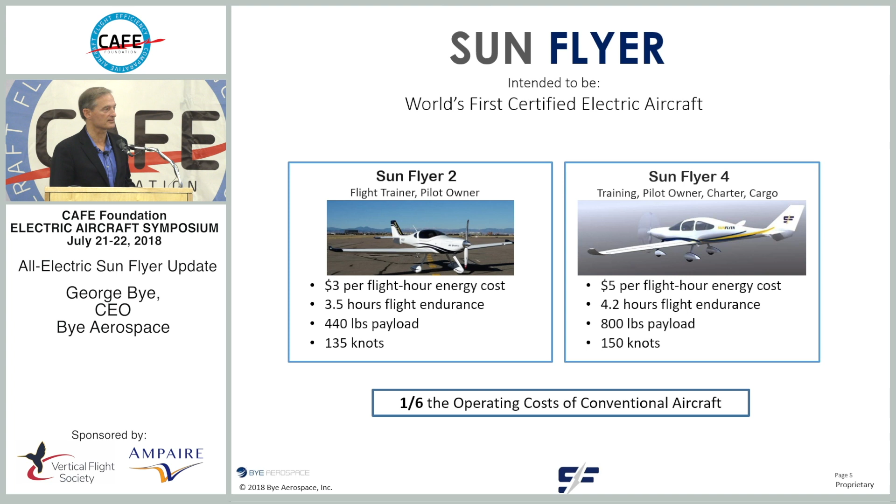But the bottom line is the baseline aircraft is the Sunflyer 2, and a combination, perhaps the most important aspect, as I've said, is the cost aspect. $3 per flight hour is absolutely revolutionary. The fully certified aspect of the aircraft is critically important as well. This last year, we made application with the FAA, the first in the world for a FAR Part 23 certified electric aircraft, number one. Very cool.

But one of the reasons why the Sunflyer works is that it's not constrained by weight. A light sport or advanced ultralight aircraft has greater flexibility, but from a regulatory perspective, it's limited by its weight. Batteries have come a long ways, but battery energy density and the weight of the battery system on a 1,900-pound aircraft is significant to enabling it to be a functional trainer in this case.

We have a 3.5-hour flight endurance with the Sunflyer. But the 1,900-pound gross weight enables the number of batteries necessary to have a practical utility as a trainer. That Pipistrel that was mentioned a few minutes ago is very limited. It's about a 45-minute flight time. It's difficult to have much of a training syllabus, training sortie in a 45-minute, perhaps an hour flight time.

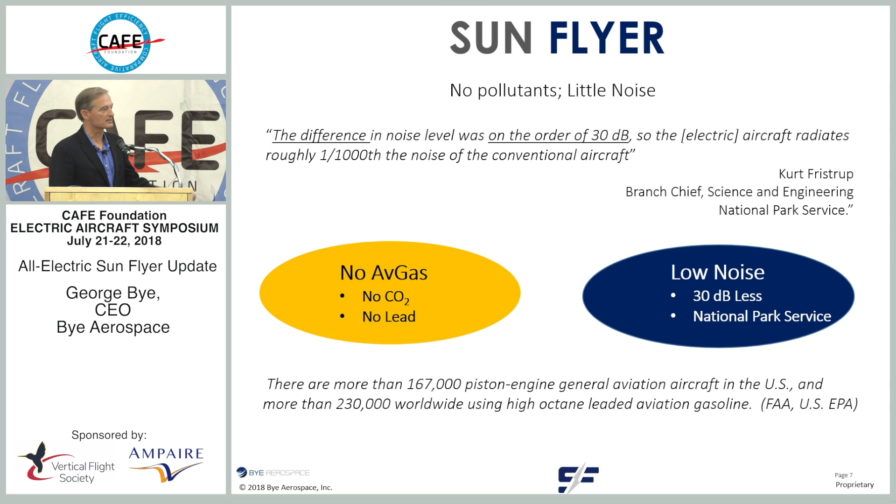Low noise, no avgas, no leaded fuel, and of course, a fantastic operating cost. The combination of engineering enables it. It's not just batteries and motors. As I mentioned, it's also structures and aerodynamics. And all together in combination creates the Sunflyer.

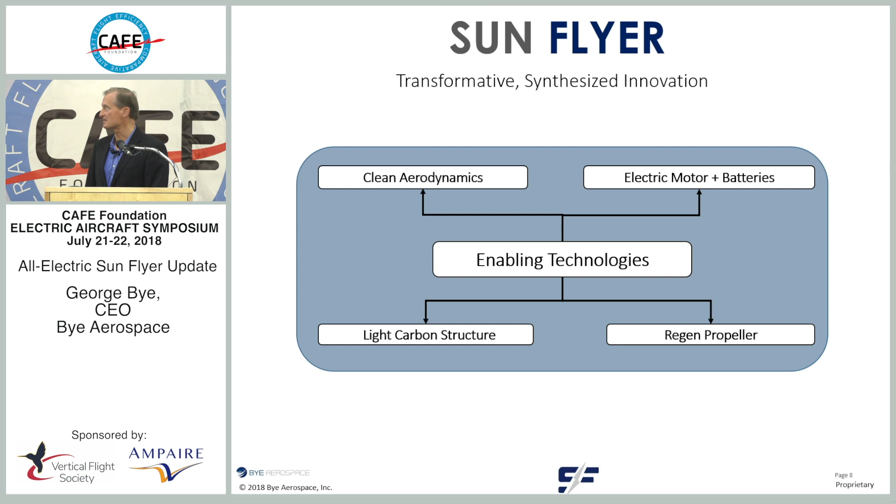One of the things that is mentioned often is, what about safety? And of course, we've heard and seen along the way a little bit of the safety discussion come up. We've had meetings with the FAA with regard to our batteries, with regard to the development and engineering process on those batteries.

We're partnered with a company called EP Systems. EP Systems is the lead engineer and battery provider for the NASA X-57. They not only meet the DO-160, but they also meet the NASA criteria for safety for batteries. And it's not just an engineered safety, it's a laboratory-tested, crushed, broken, poked, destroyed. They literally did everything they possibly could to demonstrate incredible safety with a brand new high-tech battery pack. Those battery packs will be flying on the X-57 soon, but they're flying today on the Sun Flyer.

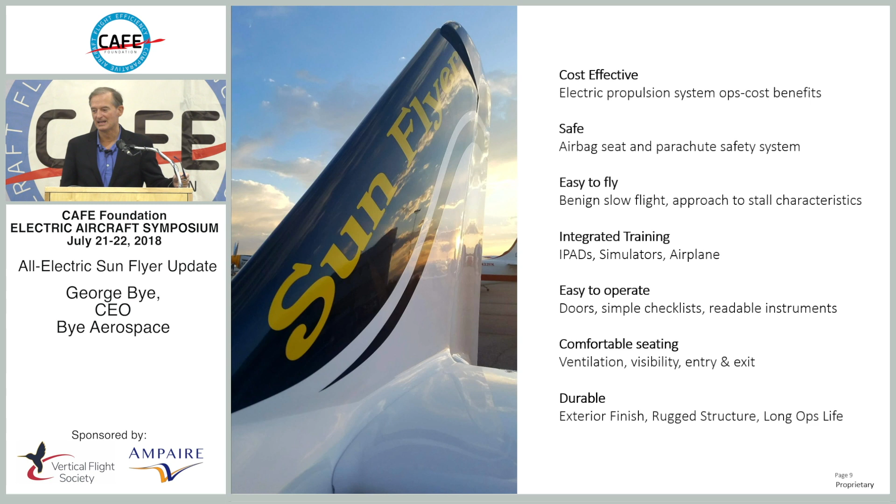That translates to average energy used. And if I need 20 to 25 kilowatts per hour on average to fly, and I've got 73 kilowatt hours useful, in addition to reserve, in addition to a depth of charge reserve, that means I have an over 3-hour flight time. It's just that simple in terms of physics. I've got a battery safety margin, an FAA 30-minute VFR reserve margin, and then I've got 73 kilowatt hours left. So if I'm using an average of 20 to 25 kilowatt per hour, that's how simple the physics are.

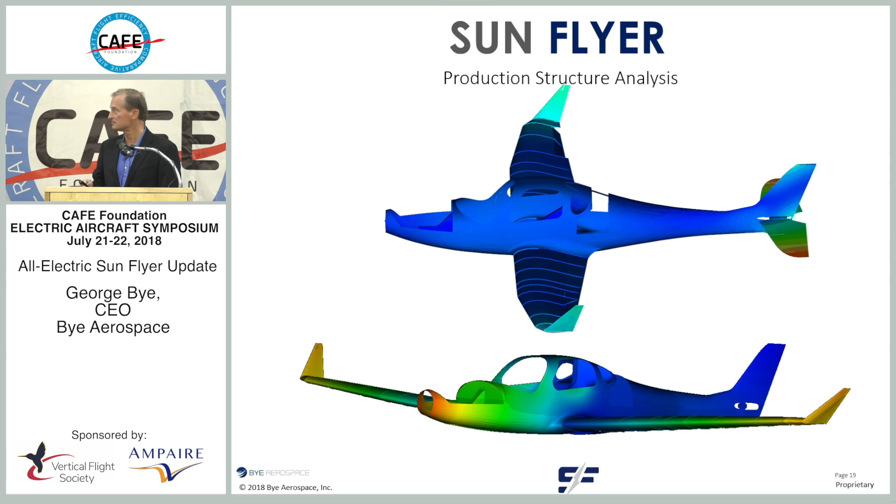That's a dry wing. The aerodynamics of that wing benefit from a simpler, more elegant structural arrangement. We have 1 square foot of flat plate area around the nose of the airplane compared to 11 square feet of flat plate area on a Cessna 172. Great aerodynamics translate to great efficiency, and of course, lower thrust required and more efficient operation.

So as I mentioned, tremendous performance out of the airplane - over 1,000 feet per minute rate of climb, 138 knots at 5,000 feet, over 20 knots faster than the Cessna 172 that we're replacing. Let me repeat that: over 20 knots faster than the Cessna 172 we're replacing.

When the Prius was introduced, we were all thinking, oh my goodness, here comes electric, and it's boxy and it's slow and low performance. Along comes electric aircraft, and people have this perception that it's an ultralight, light sport, it'll kind of plod along - maybe efficient and quiet, but no performance. At 5,000 feet, 138 knots, and that's with another 10 kilowatts yet to go in our continuous power rating. In other words, we'll be even faster than that with the two-seater.

You know what our altitude is? I'll take from the audience any suggestion what our altitude is for the Sunflyer. 280 was one. Anybody else? Higher. It is higher. Carl, I'll give you a shot. Josh? 38,000 feet. Now, practically speaking, of course, 17,500 for a VFR airplane, et cetera. But electric doesn't consume oxygen - there is no density altitude restraint for the Sunflyer. 38,000 feet, amazing. Whole new possibilities become imaginable with the Sunflyer.

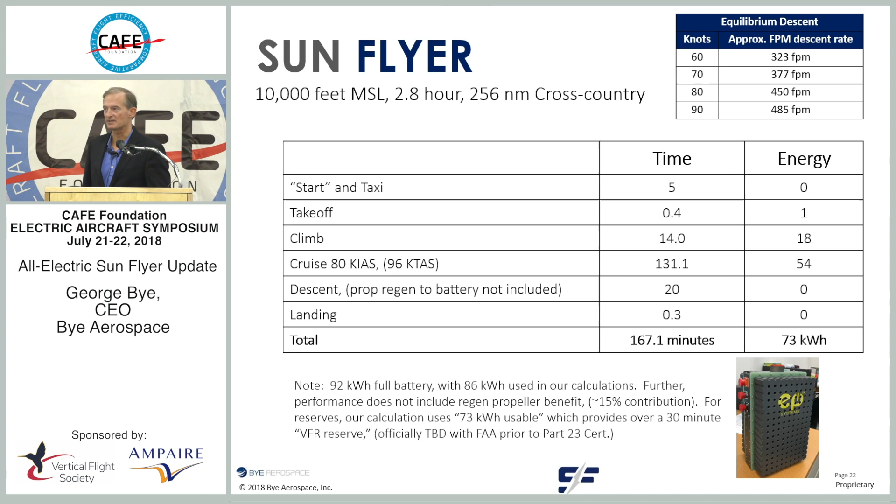Here's a typical cross-country: 2.8 hours, 10,000 feet, 250 nautical miles. Absolutely no restraints on a typical flight training syllabus. And again, I mentioned 73 kilowatt hours - we actually have 15, almost 20 kilowatt hours more in the battery pack than what we're using as our baseline performance measurement. That includes the VFR 30-minute reserve and a further restraint on the battery pack itself for its longevity. And of course, the standard meat and potatoes - takeoff and landing, pattern work, the 1.2 hour syllabus typical - is well within the capability of the airplane. In fact, we can probably double, almost triple turn the aircraft before recharging.

This is the bottom line for a flight school. This is why the flight schools are ordering aircraft. When it gets right down to how you maintain and operate and fly a fleet of trainers, this is the bottom line. It boils down to cost - $14, including battery pack reserve.

And the fun thing about battery packs is they just get better. So in about the 3 to 5 year timeline that we're replacing the battery packs for a high ops tempo flight school, the battery pack energy density will likely have improved by about 30%, perhaps as much as 50%. So the 3.5 hour flight endurance Sunflyer 2 now becomes a 4.5 or 5 hour Sunflyer 2, and the 4-seat Sunflyer even better. The fun thing about electric is not just the economics and aerodynamics, but also the future and how we look forward to an improving future as batteries just get better.

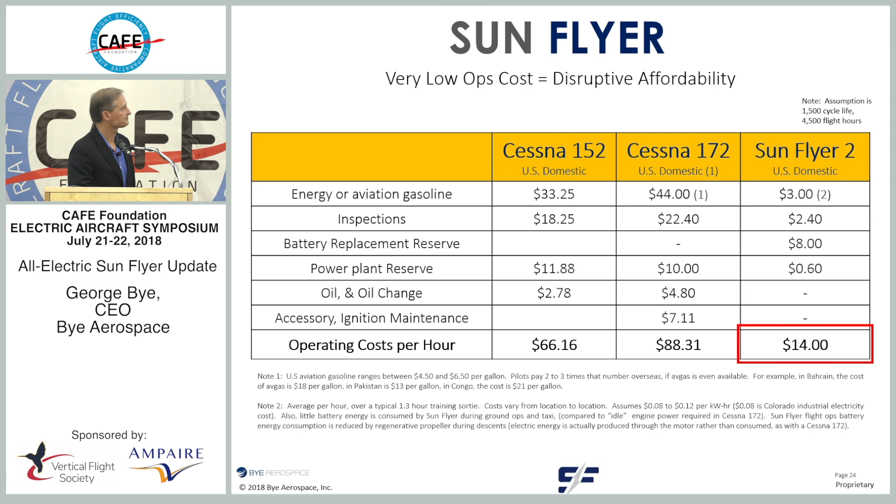And of course, on a cross country, depending on how you're using the aircraft, the numbers change. We call it a $100 hamburger when we go with our friends for a cross country to get lunch somewhere. This kind of changes the metrics.

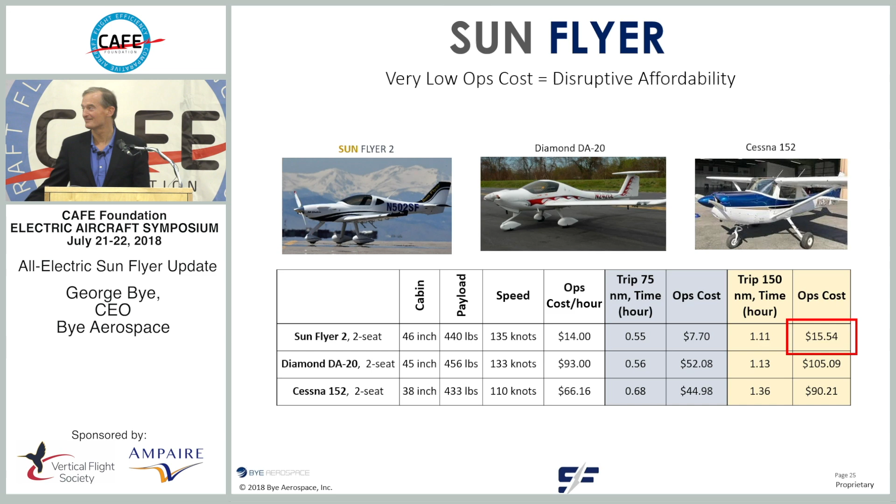And of course, the Sunflyer 4 we introduced last year. Many of our friends, pilot owners, are putting orders in now for the Sunflyer 4 as well. It's the stretched version of the Sunflyer 2, about 36 inches longer, and of course heavier, allowing for the additional battery packs, the higher speed, and the longer range.

And again, you look at the economics with a Cirrus or a Cessna 182. Absolutely compelling. It's not even fair. It's hard to imagine in the same market electric aircraft with conventional aircraft. Imagine a 50-year-old Cessna 182 sitting next to a brand new Sunflyer 4 aircraft. The economics and performance are so disruptive you cannot put the two in the same market.

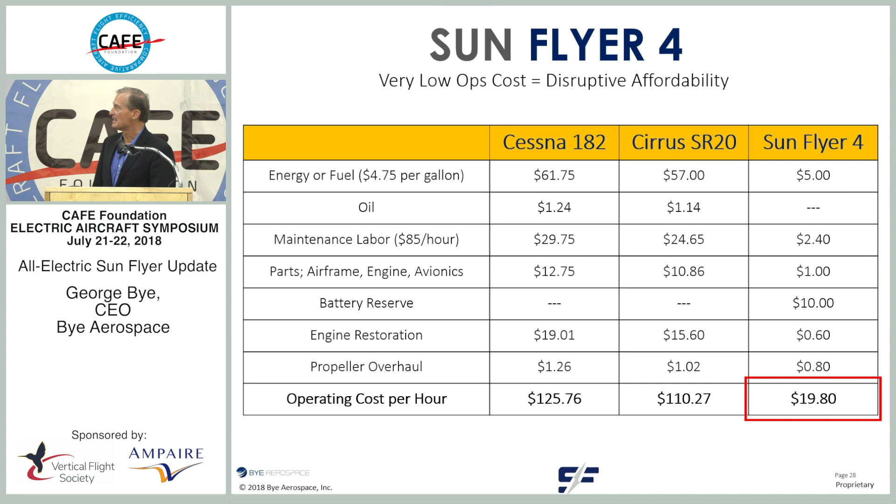We'll look at the Los Angeles area as one possibility, and of course there's many metro areas that have similar kinds of density. I think there's some 30 plus airports in the LA area, 30 to 50, depending on how you count.

Imagine the possibility of using those airports today that cannot or are underutilized, providing support for commerce and transportation, charter, and personal use in that area. No emissions, no noise, and extremely low cost. Santa Barbara to LA in an electric airplane, 3 to 4 times faster than it would be to drive, and less expensive than it is to drive.

So you look at the economics again compared to some of the traditional general aviation aircraft.

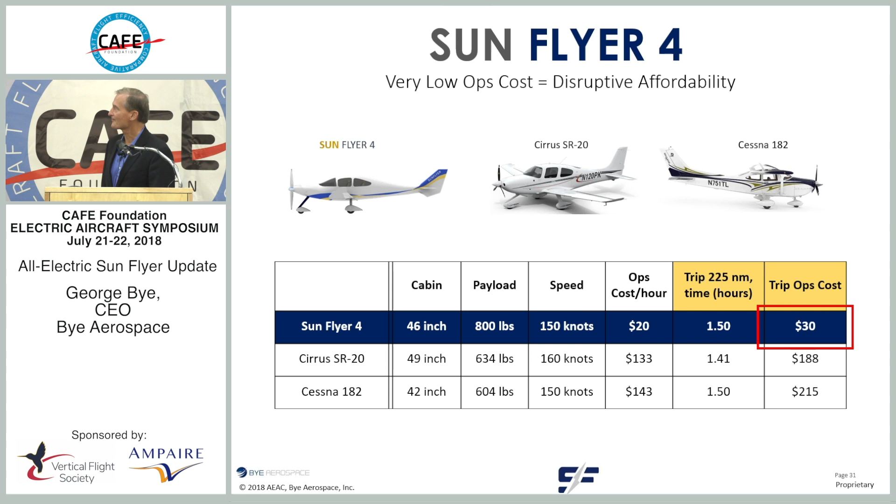So in kind of wrapping up, it's important, I think, from our perspective with Bye Aerospace, that our innovation and pioneering work is to solve a problem. You look at all the statistics and the numbers around the industry that we're concerned about addressing. Electric aviation addresses these problems. If you understand the demand from a broader industry perspective, what that means to the people that need to fly those aircraft.

That translates to a trainer demand and a rationale for Bye Aerospace and the Sunflyer to exist. We need to have solutions that meet economic requirements. It's not just recreation, it's innovation with a purpose. It's a lot of pilots and a lot of aircraft, and again, the number one reason why they drop out is cost. So addressing that with the Sunflyer is a huge, huge requirement met.

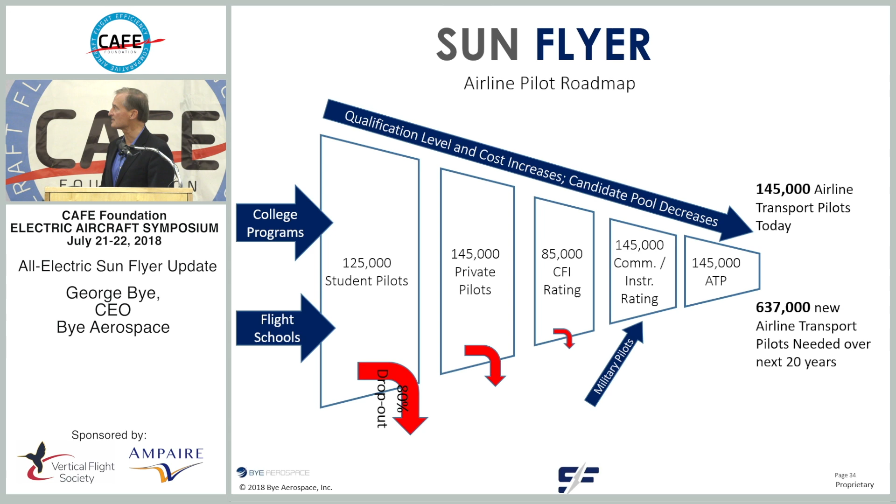So the Sunflyer 2 and the Sunflyer 4 are being introduced to the market. The Sunflyer 2 is $289,000. Sunflyer 4 is $389,000. We're taking deposits for both aircraft. It's about a 2-year timeline, mid-2020 for the Sunflyer 2, and about a year or so after that for the Sunflyer 4. We believe the Sunflyer 4 will get certification credit from the 2 because literally it's a stretch of the aircraft with a similar systems architecture.

So at least thus far in conversations with the FAA, they are agreeing with us that architecture similarity will allow an acceleration to the certification program. The motor and batteries are both TSO. They'll be supported by Siemens and EP Systems respectively, so they will be working with us on the certification of the batteries and the motors, but in the collective, Bye Aerospace can accelerate the certification program with that approach. So that was some great news with the FAA.

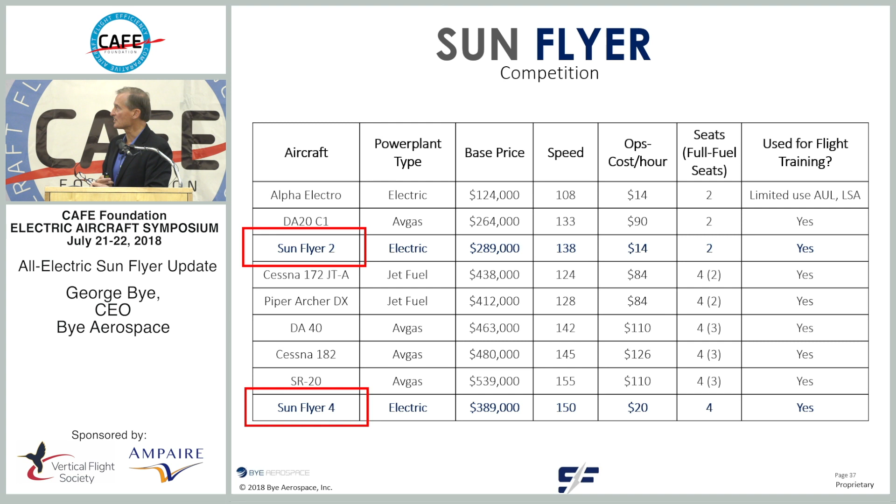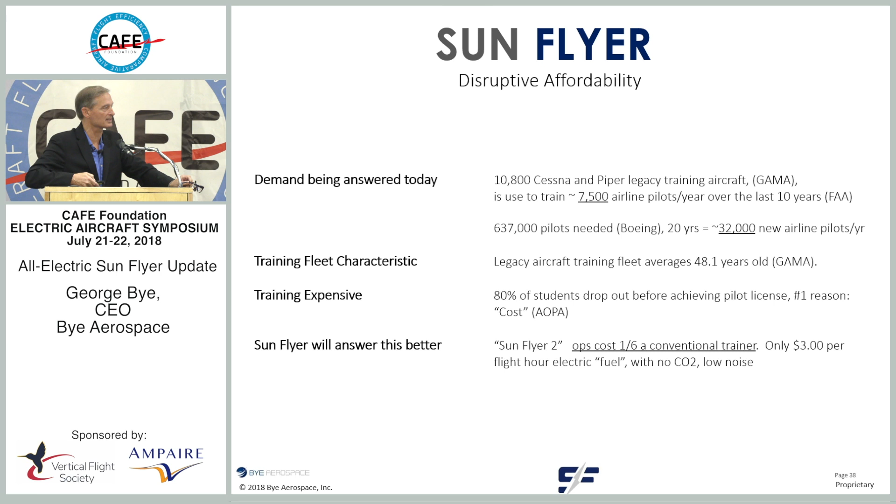And again, a quick comparison to some of the other fleet. You're probably well aware, and we've already covered it quite a bit, but the advantages with electric are absolutely phenomenal. So disruptive affordability translates to market viability, and of course the training that results will bring a new generation of pilots into the cabins of the Airbus and Boeing aircraft around the world.

We think there's about a 15,000 aircraft requirement. Those 10,800 trainers and a portion of the personal use aircraft will be replaced, we think, with electric. So over the next 10 or 20 years, about 15,000 units would be our prediction for the market in the near-term future.

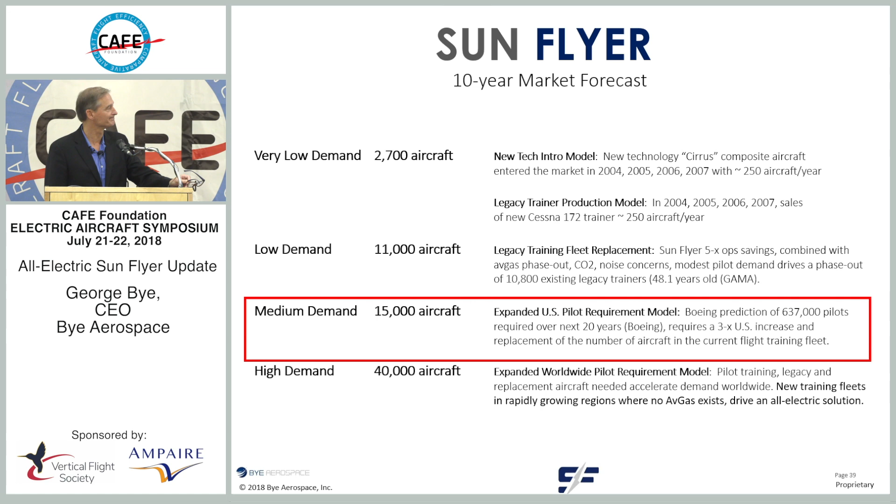Lots of great media. Who gets AOPA magazine? Does everybody? There's a great article in the new one that just came out on the Sun Flyer. Please enjoy that. We're very grateful to AOPA, Flying, and a number of the media outlets for the coverage we've been getting. It's been absolutely wonderful.

We're honored as a team to be bringing the Sun Flyer to market. As was already mentioned by Kevin and Josh, I think we all agree that we win when we work collaboratively together. This is an industry that's changing, and people in this room help make that possible. Thank you.